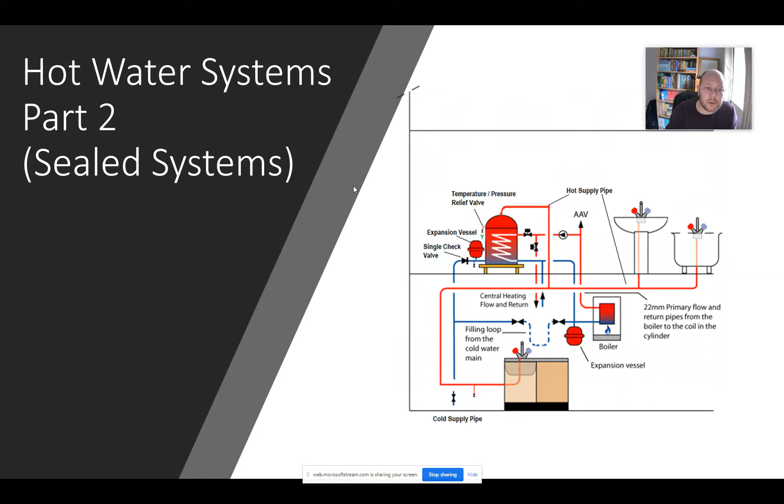So now looking at hot water systems, sealed and unvented, part 2. In this part we're going to look at mainly sealed systems. There's not loads in your test about this, in fact there's very little, but it's worth being aware of it because it is the type of system that's being fitted more and more often these days.

So in sealed systems or unvented systems, they would be fed from the mains, from the cold supply pipe. We know that that's the name of the pipe which comes in from the mains, okay? And it would deliver hot water at high pressure. Our unvented systems are different from our open vented systems. In our open vented systems, as we've just discussed, they use cold water storage cisterns to allow for the expansion, and it expands up through the cold feed pipe under normal working conditions.

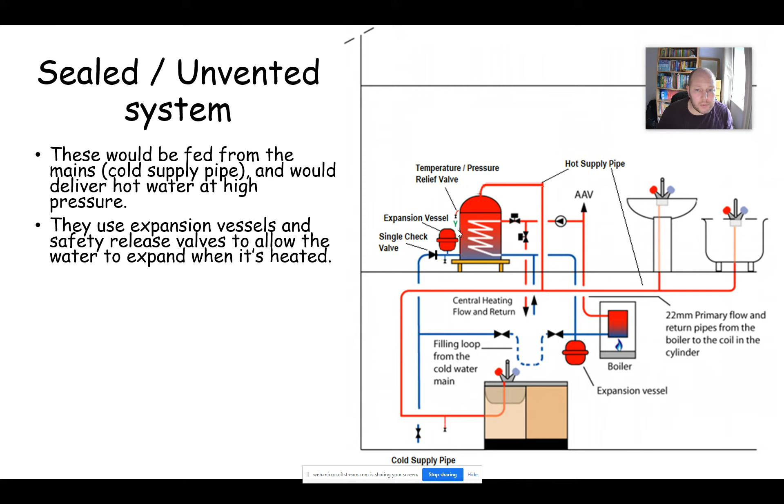Whereas with a sealed system or an unvented system, we don't have that facility, so we need to allow for the expansion in a different way. And we do that through the use of expansion vessels and through pressure relief pipework in the case of a fault, essentially. Okay.

Because they're connected to the mains, we need to be a little bit more careful with regards to backflow prevention, because normally in an open vented system we've got the air gap between the float valve and the overflow, and that gives us appropriate backflow prevention to protect that system. Whereas within a sealed system that is connected straight into the mains, we need to make sure we fit a single check valve, because the water's heated in here, which changes it from category 1 water to category 2 water. Okay.

So it's connected directly to the main, so we need to make sure we have appropriate backflow prevention, and we also need to make sure that it's safe as well. Unvented systems can be potentially dangerous, and we're going to talk about the reason for that soon. You actually need a special qualification to install any unvented system that has a capacity greater than 15 litres, because it can be potentially dangerous.

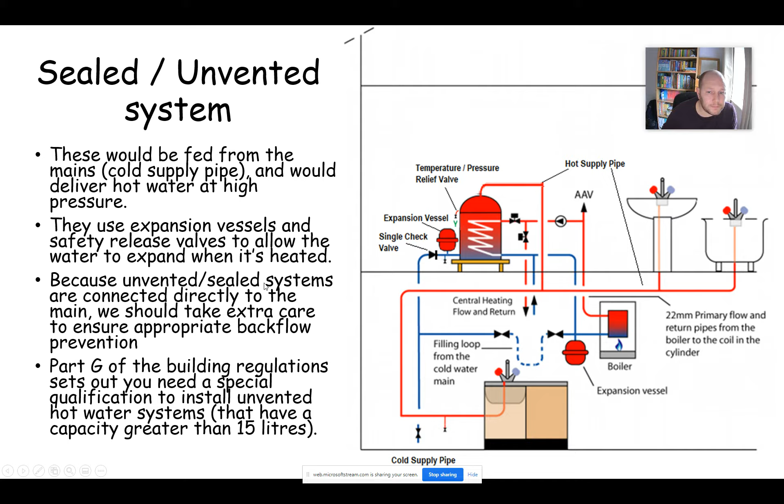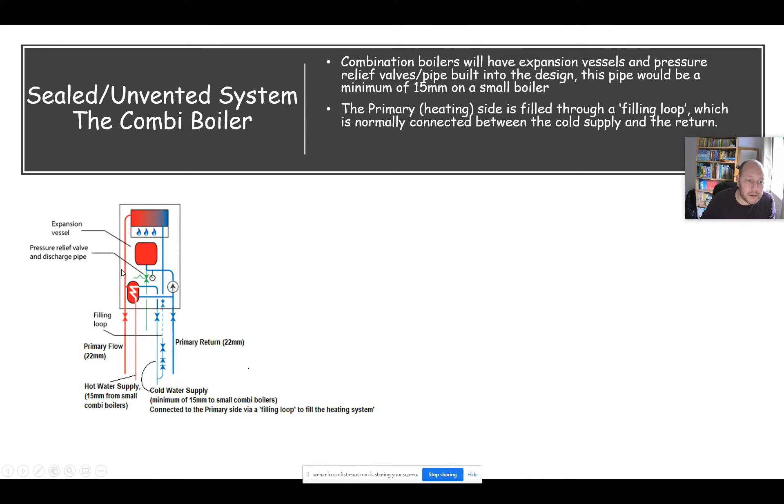Right, sealed combi boilers, combination boilers, are actually going to be considered a sealed system or an unvented system. Essentially, they've got an expansion vessel built inside them, and they'll also have a pressure relief valve fitted on them as well. So if the system overpressurises, it can vent, and it allows for expansion as well with the expansion vessel. Generally speaking, they don't store water. You can get some which will store a small amount of water to help ensure you get a better flow rate.

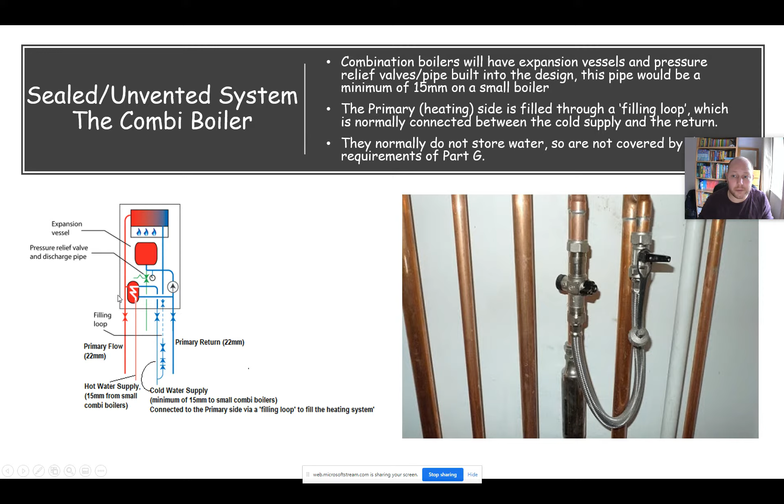But generally speaking, combi boilers don't store water, so therefore they're not covered by the requirements of Part G, because even though they're a sealed system, they don't store that water. So you don't need an extra qualification. You would need, obviously, an appropriate gas qualification if you're going to fit a gas boiler. But you wouldn't need an unvented qualification to fit a combi boiler, because it would store less than 15 litres, and generally speaking, they don't store any water in them. Okay.

So hot water supply pipe: as we know, a supply pipe would be delivering water at high pressure, so the pipework supplied from a sealed system or an unvented system would be described as the hot water supply pipe. It's going to be a minimum size of 15 mil, and you could run that at 15 mil into a bath, as you would from a small combi boiler, because the flow rates aren't that great. So if you're running a supply to a bath from a sealed system, you could use a minimum of 15 mil to all appliances. It's higher pressure.

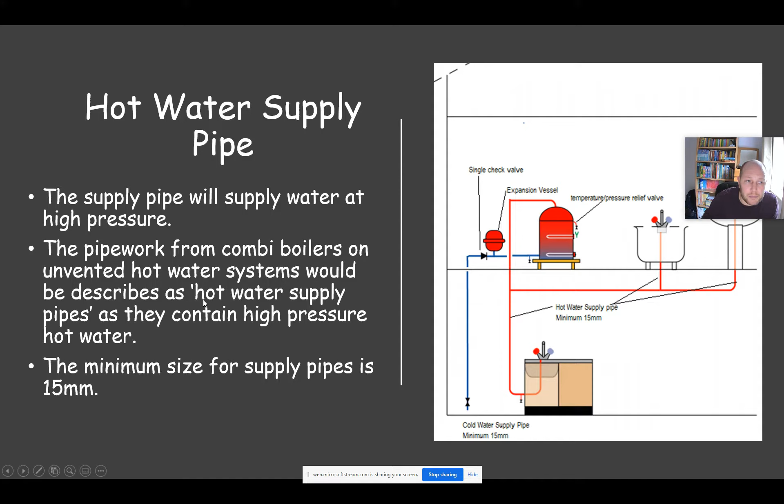Pipework from a combi boiler, like I say, is described as a supply pipe because it contains high pressure hot water. And the minimum size for this is 15 mil. So we're going to look at controlling the temperature and safety.

All system types must have a cylinder stat, a cylinder thermostat, which should be set between 60 and 65 degrees. It needs to be at least 60 degrees to make sure the water's pasteurized, essentially. Legionella bacteria dies off very, very quickly at 60 degrees, literally within a few seconds. So if you heat the whole cylinder up to 60 degrees, it ensures that you're safe. All of the water coming out of the taps is not going to contain Legionella.

And it should be set at a maximum of 65 for a couple of reasons. It helps reduce wastage of energy, because the hotter the water, the more heat loss is going to happen. And, especially in hard water areas, it reduces the likelihood of as much limescale precipitating out of the water when it's heated.

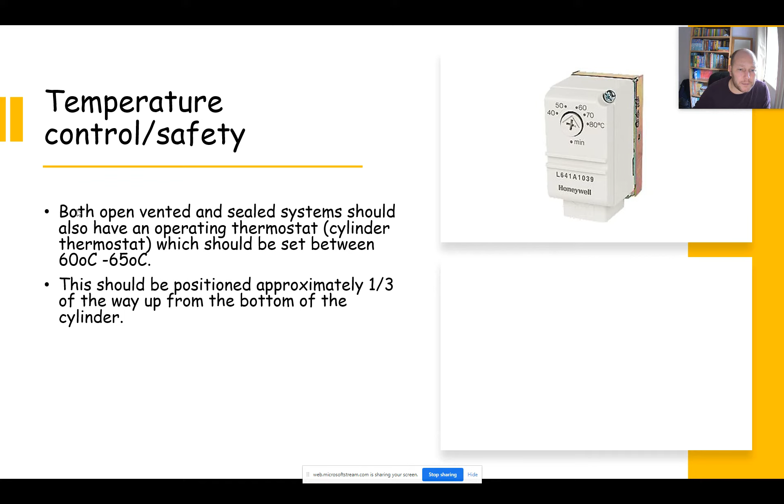So the cylinder stat needs to be positioned roughly a third of the way up from the bottom of the cylinder, and that's so the majority of the water in the cylinder gets heated to the temperature that it's set at.

On top of this cylinder stat, the control stat, on unvented systems they should also have a high energy cutout, which should be set between 80 and 85 degrees, which means that if the water in the cylinder reaches that temperature, it will send a message to the boiler and motorized valves to shut down and stop the primary water flowing to the cylinder and heating it up anymore.

The reason that we have to have this on an unvented system is essentially because if water's under pressure, the boiling temperature changes. So in an unvented system, you have water which is under pressure. It's not just atmospheric pressure like it would be if it was being fed from a cistern. This is going to be potentially 3 bar, which actually means that the temperature that water will boil at will be significantly more than 100 degrees C, which means if there was a fault and that water temperature continued to rise past 100 degrees C,

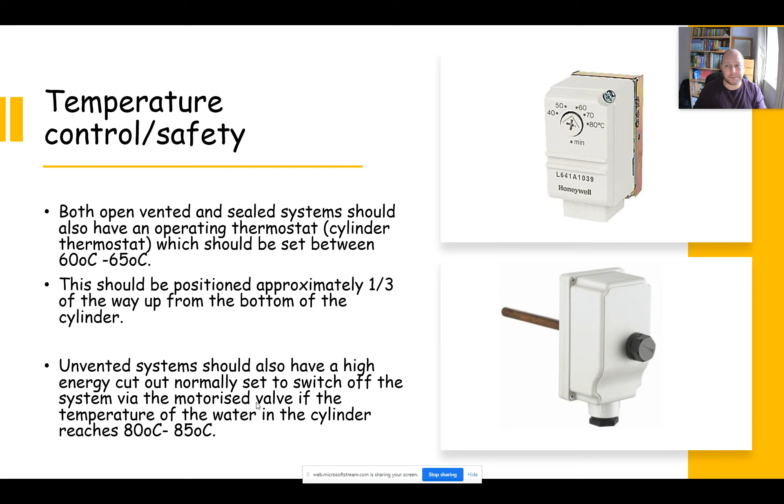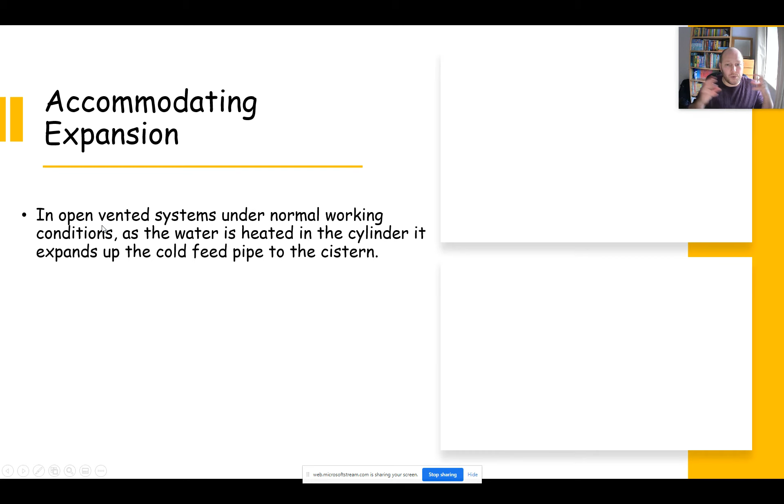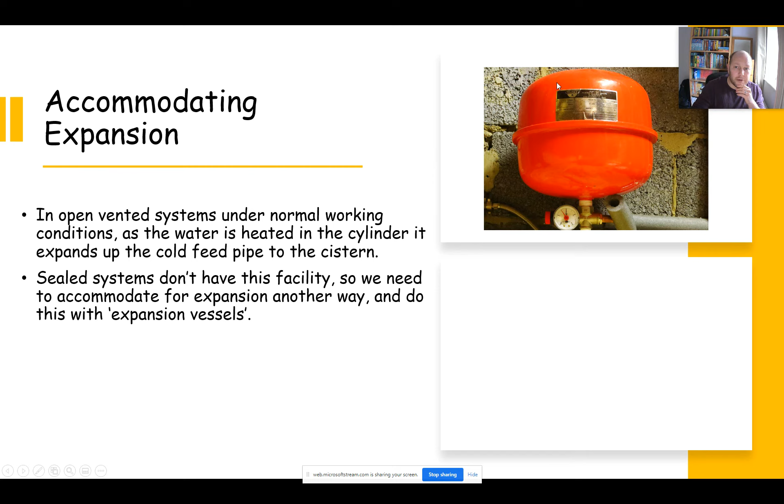So in terms of accommodating expansion, like we said, open vented systems under normal working conditions, water will expand up the cold feed into the cistern. But we don't have that facility with our sealed systems, so we'd fit expansion vessels like this big red thing up here. The way they work inside is they've got a diaphragm inside, and they'd be pumped full of air up to a specific pressure, depending on how much water is in the system.

And once they're connected onto the system, as the water heats up, the water will start to expand, and it can then expand into here, and it pushes on the diaphragm, which will then compress the air in the expansion vessel, and that allows for the water to expand.

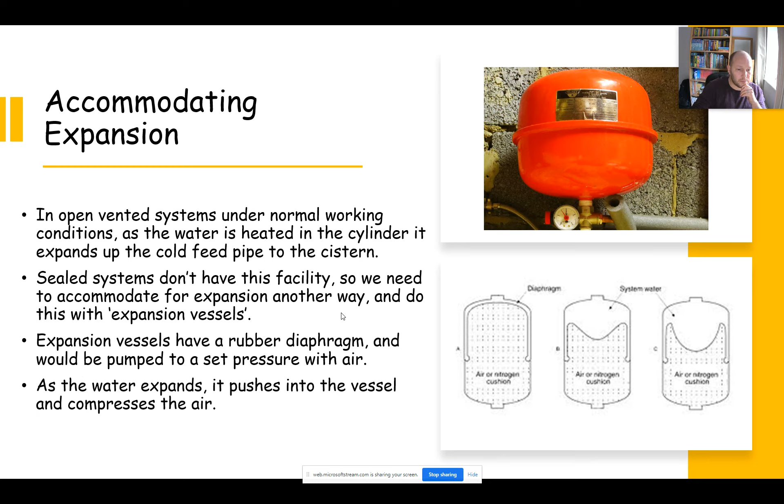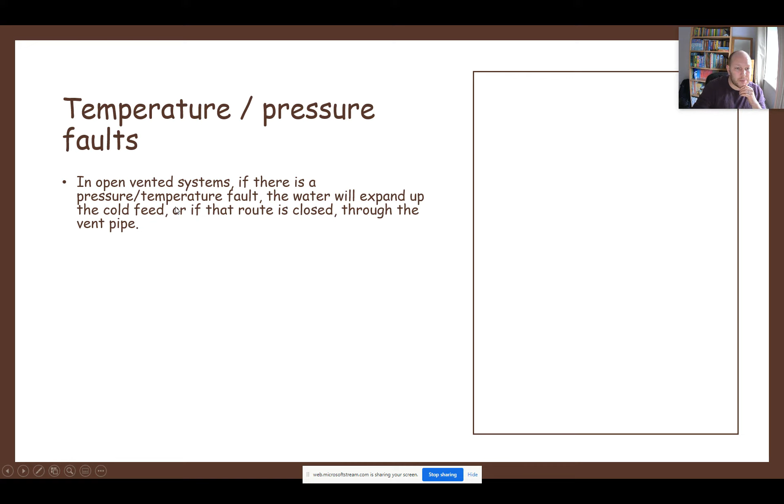Briefly look at temperature and pressure faults. Like I say, an open vented system, if there's a temperature or pressure fault, it would expand up the cold feed. If that route's closed, it would expand through the vent pipe. Unvented systems have to use valves for this. So on here, we would have a pressure relief valve, and on here we've got a temperature pressure relief valve. I think, if I remember rightly, this valve is normally set to about 3 bar, and this one's probably set to about 9. I'm 99% sure that's right.

So, for example, if there was a fault, this one would vent before there was a risk of this rupturing. This here is not just a pressure relief valve; it's a temperature pressure relief valve, which would also start to open if the temperature in the water started to reach about 90 degrees C, and should be fully open by the time it reaches 95 degrees C. And that's to make sure that the water doesn't boil in here. So it would allow this hot water out and allow cold water in to replace it essentially.

So there's very little chance of water ever boiling in here because we've got the control stat, which should be set to about 60 to 65, a high limit stat, which should cut it off if it ever reaches 80 to 85, and then if there was a fault with that, this would open if the temperature got up towards 90 to 95. Okay. So, expansion valve fitted, allows the water out of the system if it over pressurizes, fitted here, and temperature pressure relief valve fitted here. Again, lets water out of the system in fault conditions.

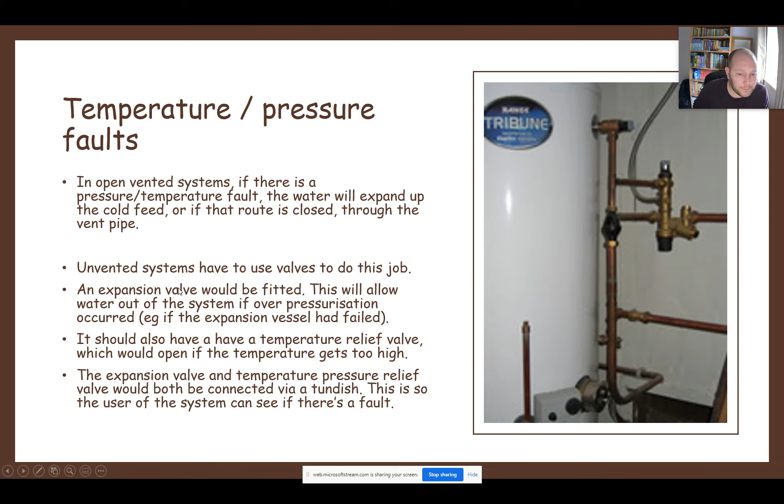Alrighty, so we're going to very quickly look at a sealed hot water and heating system. You can see all the things we've just talked about here. So we've got the cold supply coming in here, single check valve to prevent backflow, expansion vessel to accommodate for expansion, and a temperature pressure relief valve in the case of a fault. Hot supply pipe coming off here delivering high pressure hot water to our outlets. Going to be a minimum of 15 mil because it's delivering water at high pressure.

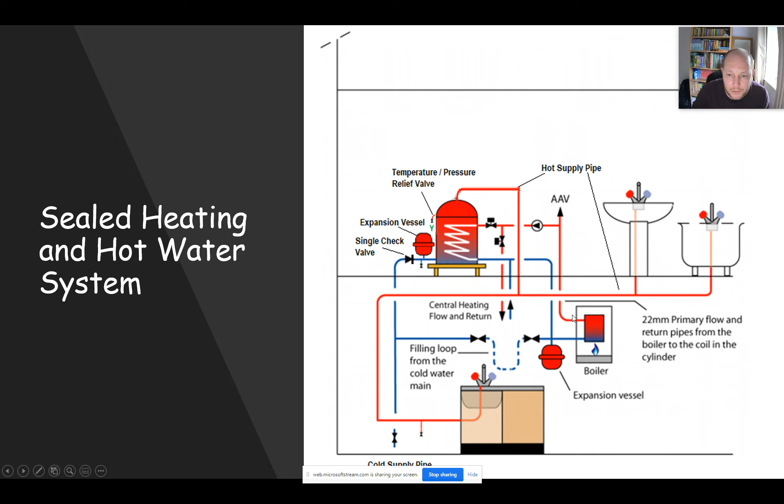Again, we've got a filling loop here to fill the heating side, because that would need to be done manually. With an open vented system, it is done automatically because there's a float valve in the feed and expansion cistern. But we need to fill sealed systems manually, normally through a filling loop. And again, on here we've got an expansion vessel to allow for the expansion of the water in this sealed heating system. Again, we've got a primary flow and return to the boiler.